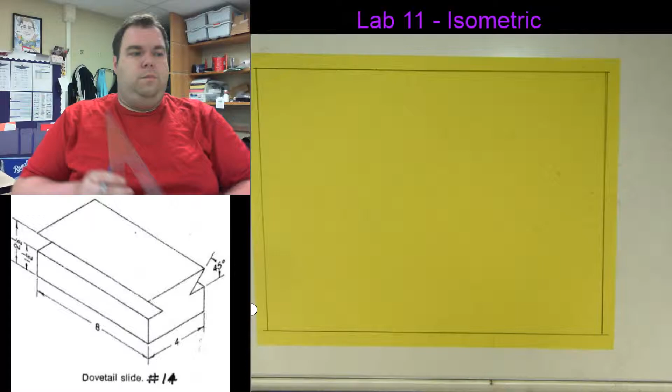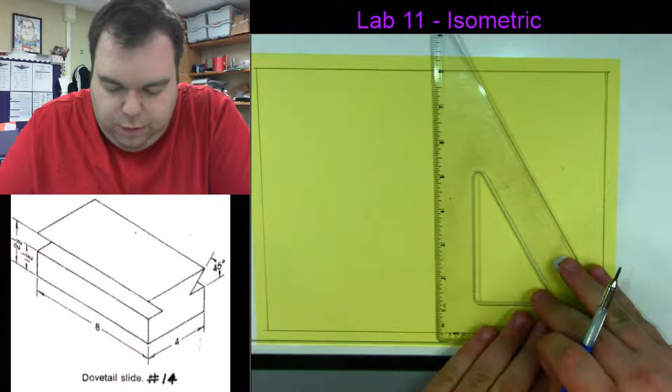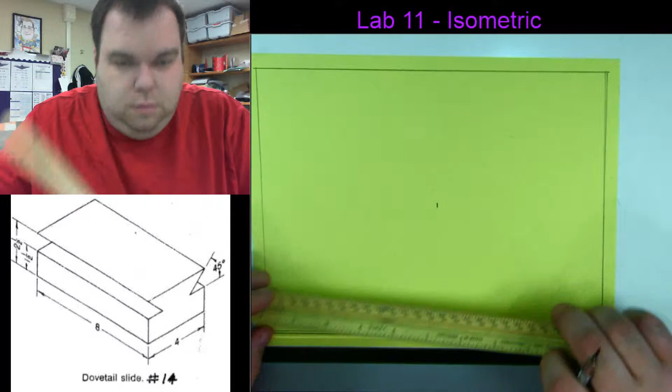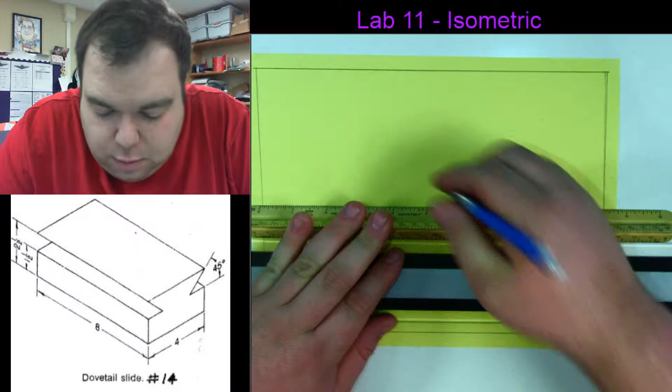Okay, so like I said, the first thing that we're going to do here is find the middle, just like always, and it should be fairly similar to all of the papers I've given you. So 3 1/4 or 7 1/4 is what I've got here. 3 1/2, 3 5/8 makes that my center mark vertically. My scale is 10 1/4, which means 5 1/8 is my center mark going this way. Alright.

Okay, so even though finding the center mark for an isometric drawing is important, it's not actually the most important part to complete an isometric drawing and have it fit in the space that you have available. So if we look at the drawing that you have, you'll see that it's 4 inches deep, 8 inches long, and 2 1/2 inches tall overall.

And very similarly to how we would draw our orthographic projections, when you create your isometric drawing, you want to create the box that your shape would fit in as well. The only difference is that this time that box is going to be a rhombus, basically.

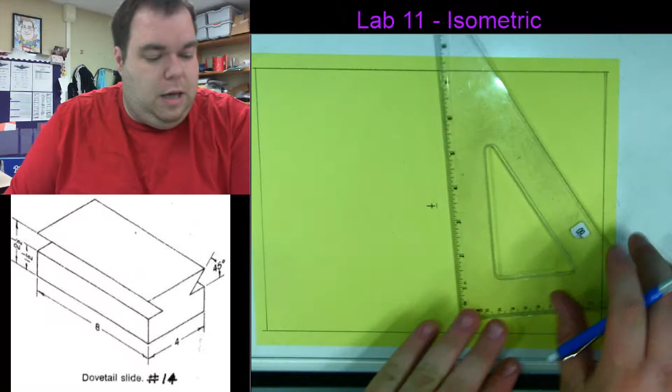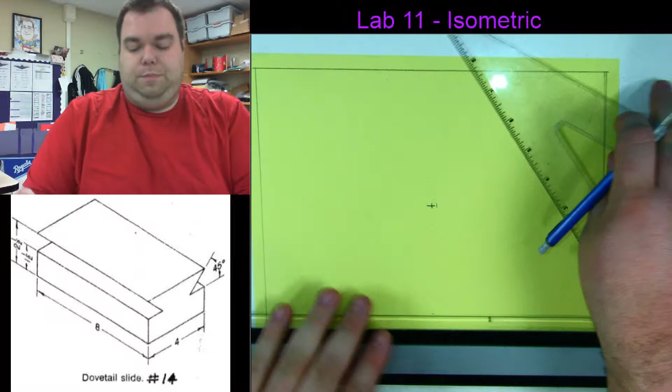So the first thing that I'm going to do is I'm going to come down from my center point. Because my shape is 4 inches by 2 1/2, I'm going to come down half of that distance when you add them together. So I'm going to come down 3 1/4 from my center mark. So if I put 3 1/4 inches there, this is not really a perfect way to do this, but it is a good general rule of thumb in order to make sure that your entire shape is going to fit on the page.

The other way you can do this is to just come down and measure the right hand side of your drawing. So if we look here, it says it's 4. If we can fit our 4 inches on the page, you can smash it as close to the bottom as you need to. So I could just do this right here and be just fine. That is basically what I'm going to do for this; the only difference is I'm going to start that 4 inches so that it comes in even with that line we measured just a minute ago.

So the mark I just made is 3 1/4 inches down, and then I placed the 4-inch mark on my triangle on that, and my first line is going to be 4 inches up along the angle of the triangle here. Now, when you're drawing an isometric, the key thing to remember is that all of your horizontal lines become 30-degree angles.

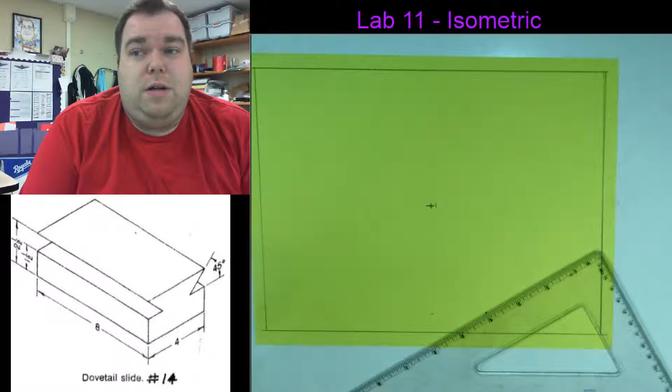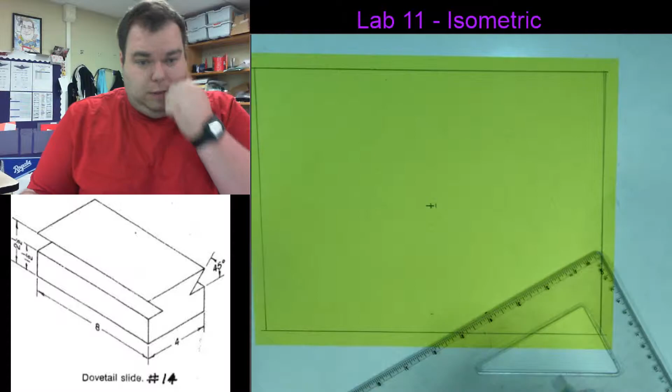So essentially, the first thing I'm going to complete is what would have been the right side view of my orthographic projection, but all of the horizontal lines are going to become 30-degree angles. And I'll show you what I mean right here. This is a 30-degree angle on my triangle. I've got 4 inches. I'm going to mark that off 4 inches up to that point there. Mine got a little squirrely at the end because the end of my triangle has been broken off, so I don't have that sharp point at the edge, so I had to fudge it a little bit.

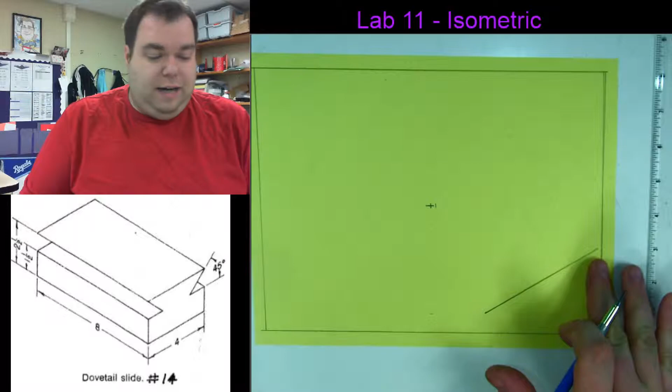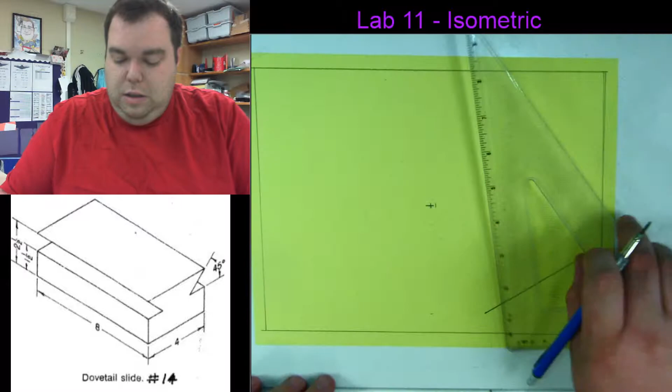Okay. The other thing you have to remember about isometric drawings is that all of your vertical lines are still vertical lines. So I've got my 4-inch 30-degree angle. If we look at our drawing, you can see that the rectangular block that makes up the bottom of this is 1.5 inches tall. So that's what I'm going to do next. I'll put my parallel rule on the bottom of my line and draw a 1.5 inch tall line on both sides of this. So point there and point there.

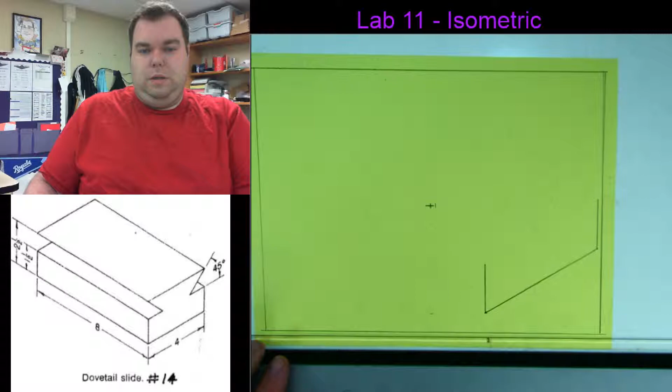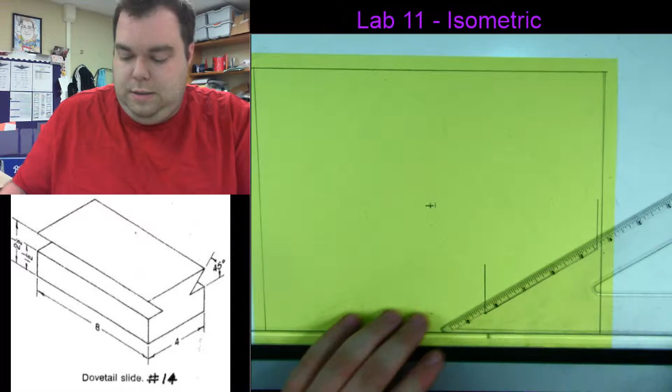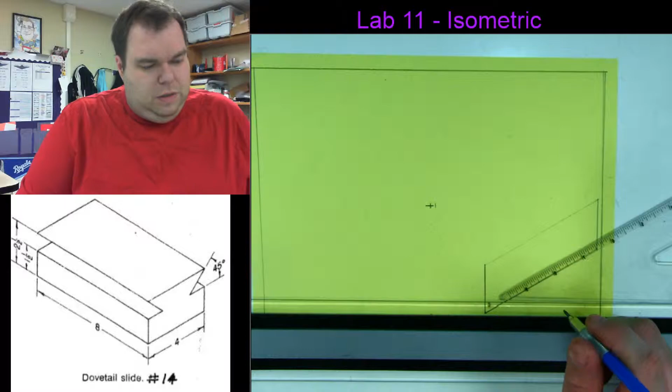The next thing that I'm going to do is lightly create a line across between those 2 points. And I say lightly because I'm going to have to erase the middle of it. We need to figure out one other thing, though. If we look at this drawing, you can see that the overall height is 2.5 inches, right? And the height at the bottom is 1.5 inches, which means the leg of that 45-degree cut-in is 1 inch, right?

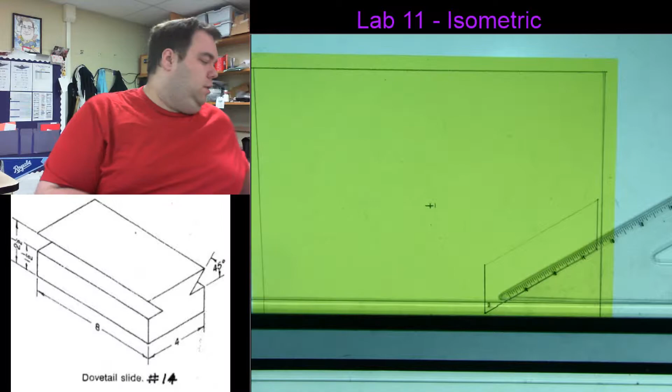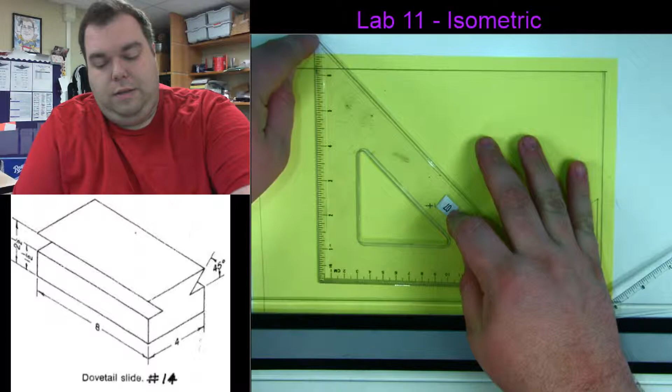And what do we know about 45-degree angles? Well, let's look at your 45-degree triangle. So that's this right here. And we know we aren't going to use this one because, while it says it's 45 degrees on our drawing, the angle is not actually 45 degrees because it's been skewed. But that doesn't change what we know about this angle. So let's say this whole thing here is 1 inch. What do we know about this?

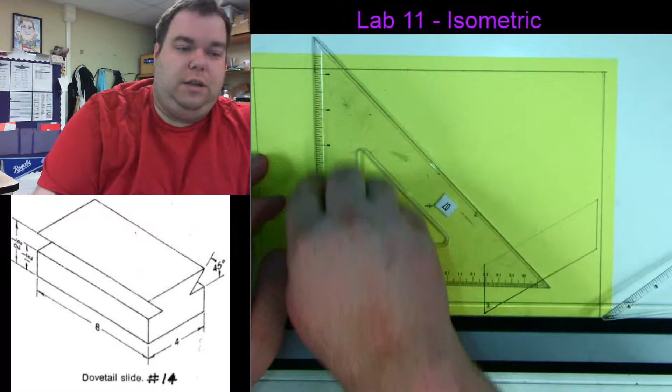What are the properties of this type of triangle? Yeah, they have 2 sides that are the same. Exactly. So since we know that this is 1 inch on this side, we also know that this is 1 inch across the bottom, right? So what we're going to do on here is we're going to come in 1 inch, and we're going to darken a line in for that 1 inch on both sides.

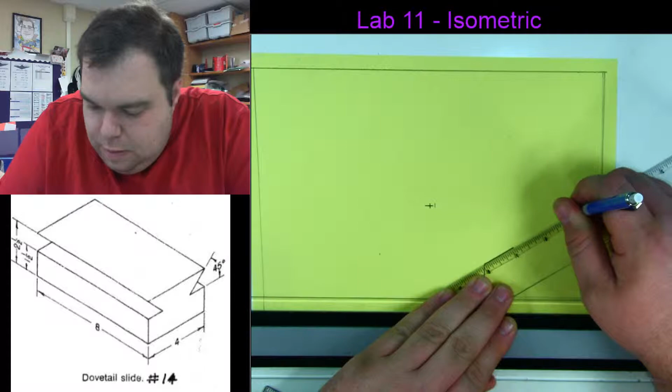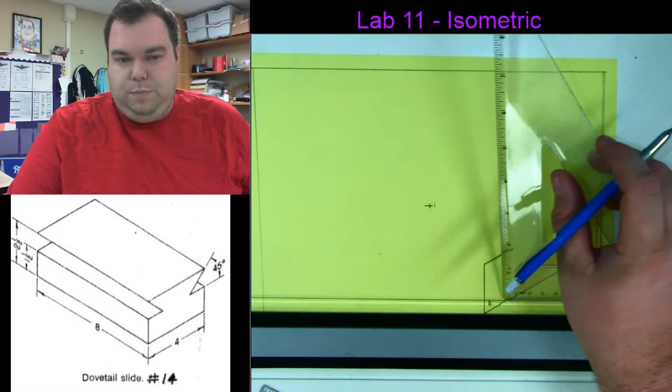Okay. And then you can take this time to erase the rest of the center because you won't need that anymore. I would recommend using your erasing shield even though I didn't just then. Okay. The next thing that I'm going to do is I'm going to set my triangle back up this way so I can measure vertically again. And I'm going to measure up and put a mark 1 inch above the vertical line that we've already created on both sides.

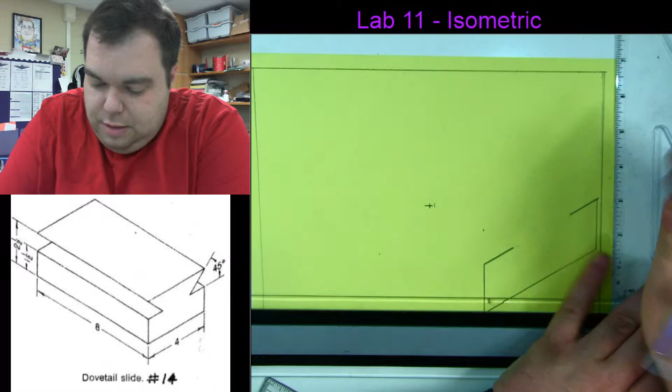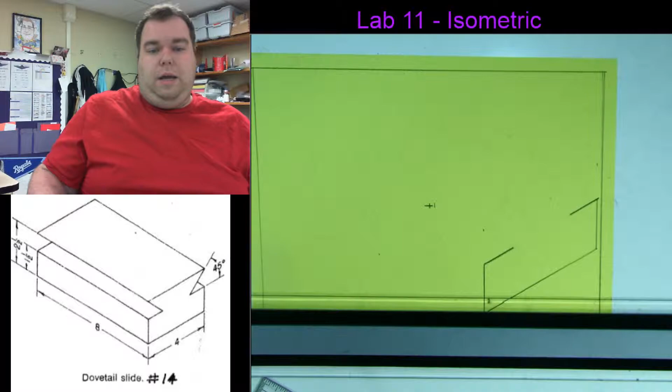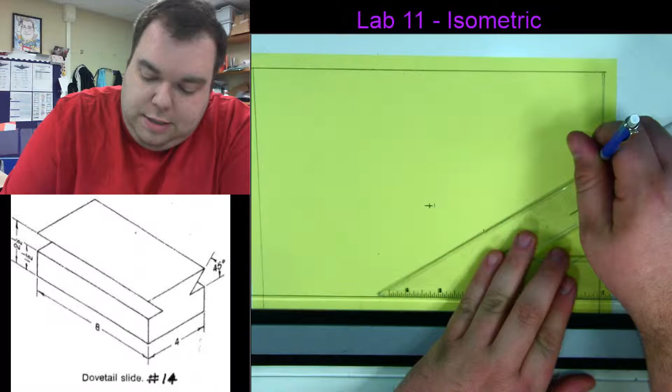Okay. And then all I need to do is 3 lines to finish this shape. Since I'm already here, I'm going to connect those 2 dots that I just made at the 30-degree angle. And then I'm just going to use my straight edge to connect the remaining corners. Let's see.

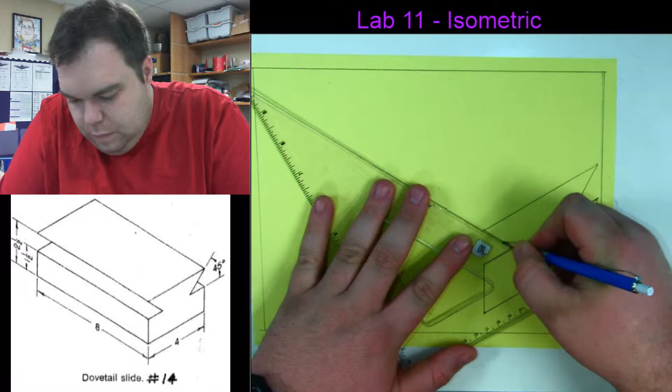So for this view anyway, this is exactly the same thing that we did to create the... I should have done this at half scale. This is not going to fit on this paper. Oh well, it's fine. This is exactly the same shape as the right side view of the orthographic projection of this shape. Just, like I said, skewed up to 30 degrees.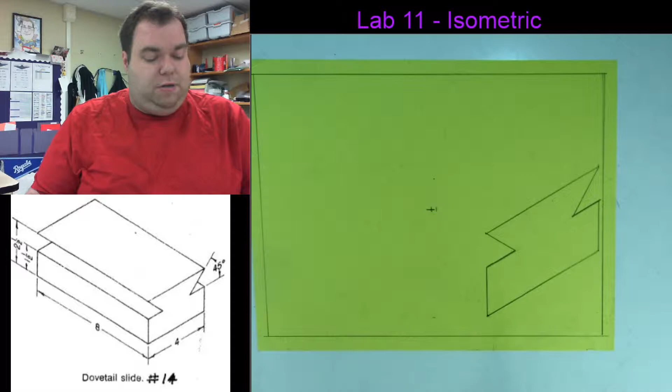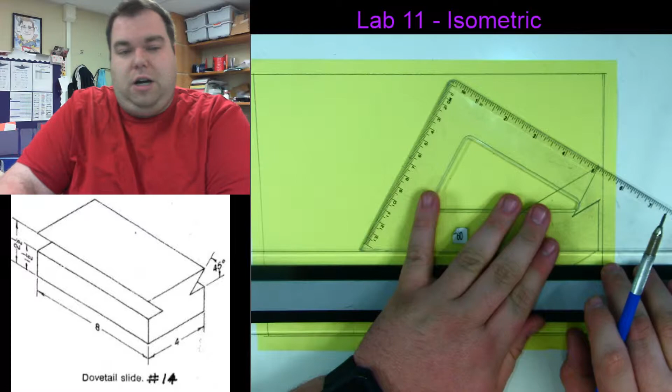Now if we look at this paper here, you'll see that it says that it's supposed to be 8 inches across going along the front view. And one thing you're going to notice is that 8 inches is definitely not going to fit on this paper, not even close. So we're going to change that number to make up for that. And we're going to make it 5 inches across, not 8. Okay, so on here, just write it in so that that 8 is a 5. And we're not going to change anything else.

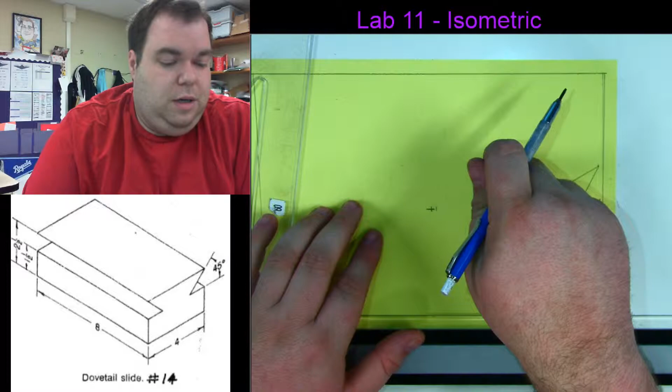So the next thing I'm going to do then is I'm going to complete the top view of this shape, which in this case is just a flat rectangle. It would have hidden lines if we were doing this orthographically, but one thing that you need to remember is that you don't do hidden lines on isometric views.

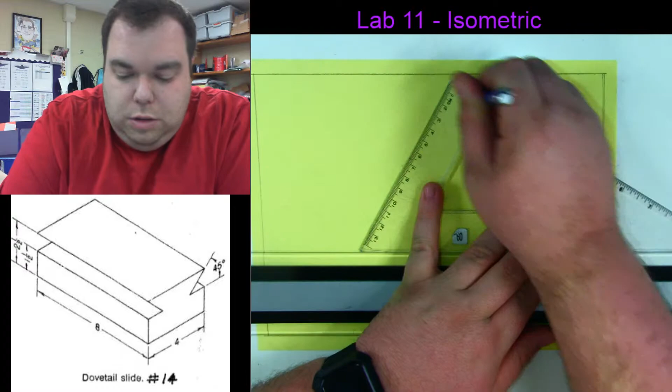So because we changed that to 5, I'm going to set my 5-inch mark on this upper corner and draw out. Same down here at the bottom. Draw out. And then flip my triangle over long ways. And connect the two. Okay. I'm actually really close to being done with this. There's only a couple of things left that we have to do. And most of it involves drawing out more of those 5-inch lines.

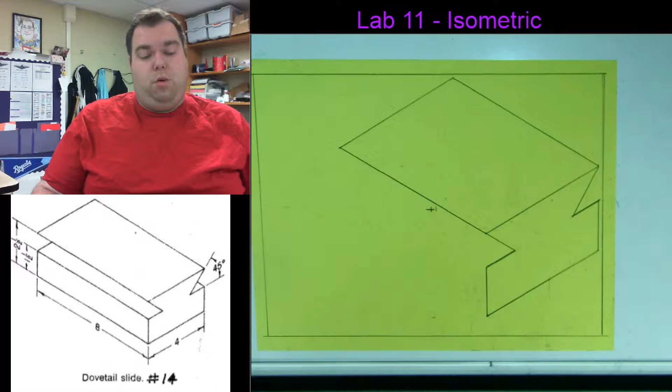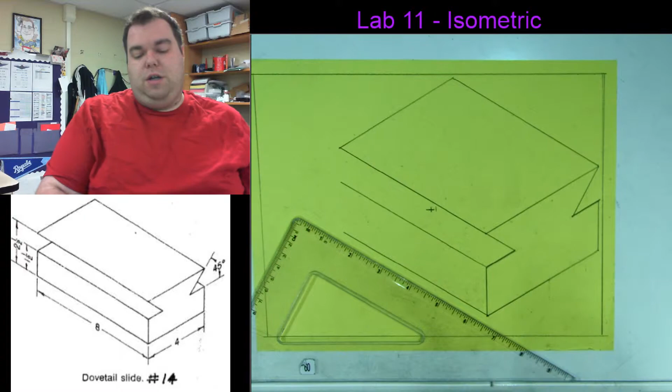So basically both of these points also need to have 5-inch lines drawn off of them. You know, I'm going to burn an inch so I stop messing with that corner problem on my triangle. If you ever hear me say that I'm burning an inch, basically that means I'm moving an inch up my measuring tool, because the least accurate part of any measuring tool is going to be the end. In this particular one's case, it's because that end has been broken off. In the case of something like a ruler, it's mostly because it's a lot harder to read that end.

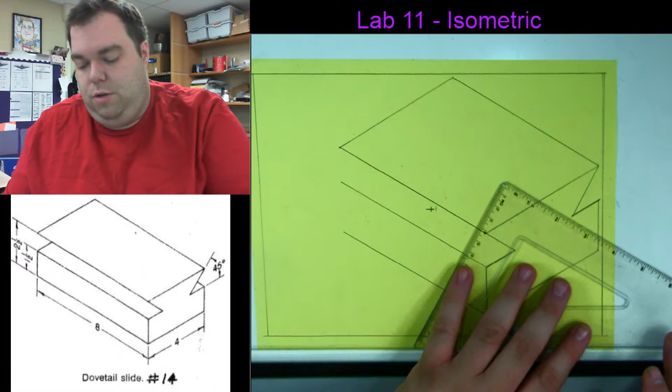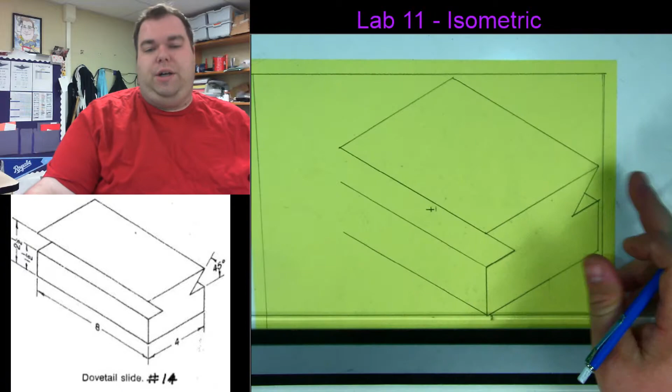And then the last thing I need to do, since I've still got my triangle in this orientation, is just take this corner over here and draw it back to that line that we've already got created right there. Just need a vertical line. And there to there.

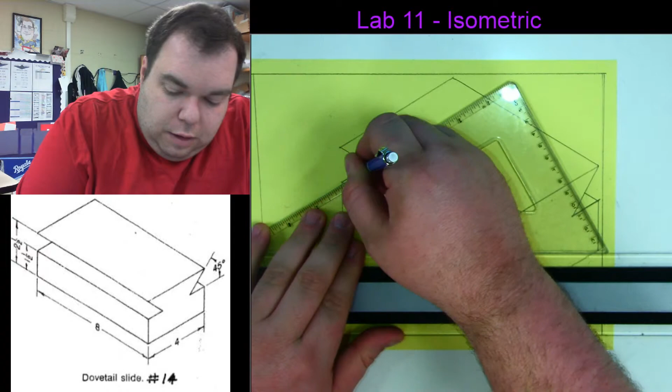Okay. So admittedly, this is a fairly easy shape to do. And that's why I chose it for your first one especially. But this is why we do it in this order. It's why you do the orthographic drawings before you do the isometric ones, because two of these shapes are literally exactly what you would have done on an orthographic projection, just turned 30 degrees in both directions, right? Alright.

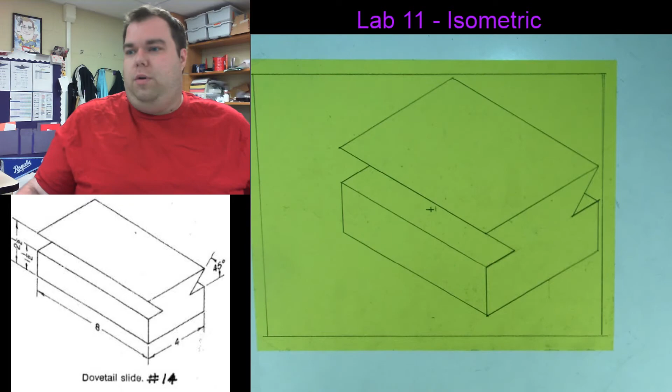This is Lab 11, so once you've got this finished, go ahead and I will get the Lab 11 turn-in popped up here in just a minute, if I didn't do that already. It should be available, but I need to change the drawing that was a part of it. And that's it. That's finishing this drawing.